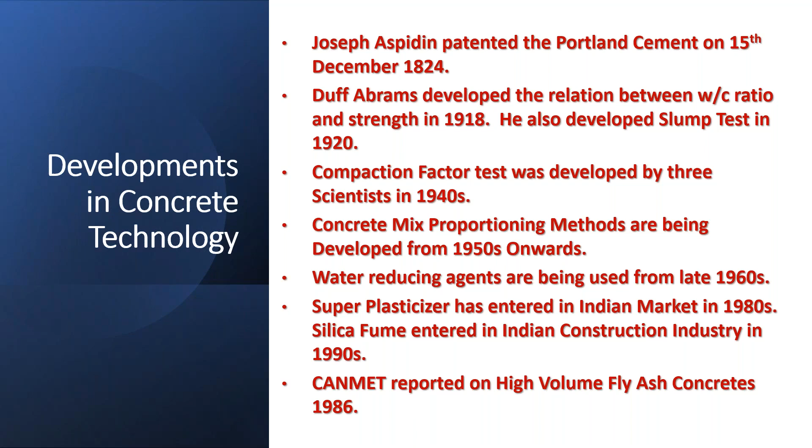Superplasticizer entered the Indian market in the 1980s. Silica fume entered Indian construction industry in the 1990s. CANMET reported high volume fly ash concretes in 1986. High strength concretes became more significant in the late 1980s and early 1990s. Works on high performance concretes have been reported from 1994 onwards.

The present scenario is that many scientists and concrete technologists are working on service life prediction of RC structures, structural health monitoring, usage of nanomaterials in concrete, enhancing the ductility of concrete, 3D printing, and also performance-based concrete mix proportioning. I want to spend this one hour on the last item, that is performance-based concrete mix proportioning. That is today's topic.

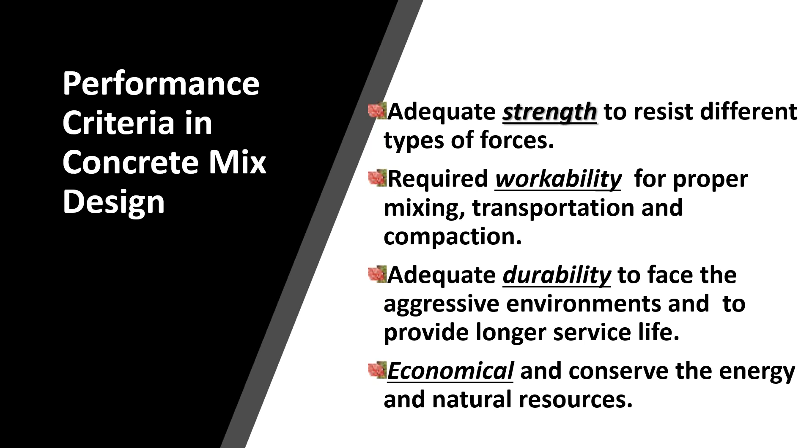What is the performance criteria? We design a concrete mix for adequate strength to resist different types of forces, and also we design for workability. Another important criteria is durability, and finally it has to be economical.

Other considerations are that the concrete mix has to be pumpable, and it has to develop early strength in the case of chimneys and cooling towers. Development of later strength is required in the case of hydraulic structures, and it has to be impervious in the case of water tanks. It should have volume stability in the case of precast concrete structures, and it should give lesser heat of hydration, especially in hydraulic structures, that is mass concrete. It should also have self-consolidation when there is congestion of reinforcement.

These are all the requirements of the concrete mix. We have to proportion the concrete mix according to our needs. There are mainly three criteria in designing a concrete mix: strength, workability, and durability. There are adequate methods to quantify strength and workability, but there is no definite method to quantify durability at the time of concrete mix proportioning.

This I want to discuss in this one hour: how to quantify durability at the time of concrete mix proportioning. I want to address this topic.

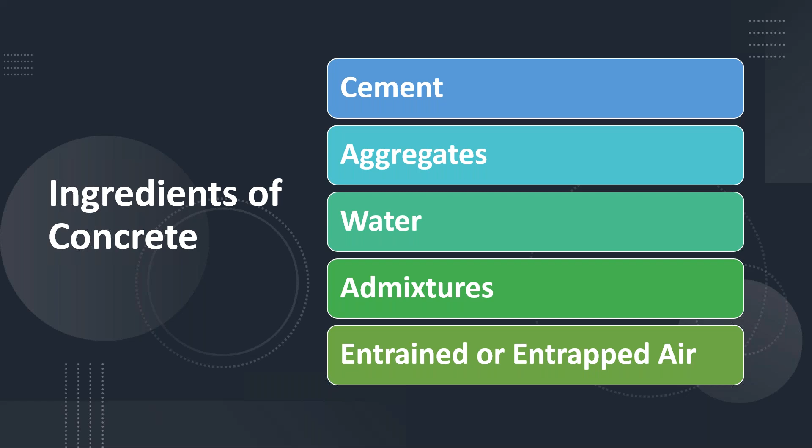The ingredients of concrete are cement, aggregates, water, admixtures, and entrapped or entrained air.

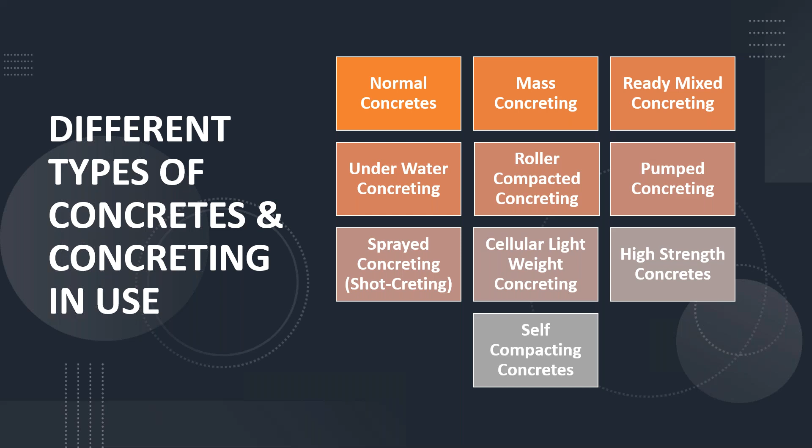We can develop different types of concretes depending on our requirement: normal concretes, mass concreting, ready-mix concreting, underwater concreting, roller compacted concreting, pumped concreting, sprayed concrete that means shotcreting, cellular lightweight concreting, high strength concretes, self-compacting concretes, and the list goes on. There are also lightweight aggregate concretes, heavyweight aggregate concretes, high volume fly ash concretes, geopolymer concretes, and pervious concretes.

Let me briefly give the developments of concrete mix proportion. Volumetric proportions were used in early 1960s because proper awareness of concrete mix proportion was not there. Proper awareness on chemical admixtures was not there up to early 1970s, and good quality fly ash was not available up to 1970s. After that, good quality cements, fly ash, and GGBS became available from 1980 onwards. The use of superplasticizers has revolutionized concrete technology from 1980 onwards.

If we look back, our limit state method was developed about 40 years back. At that time, the maximum strength was not more than M40. Now, with the use of superplasticizers and silica fume, we are getting M80, M100, and more, because these two things have revolutionized concrete technology. The use of blended cements and supplementary cementitious materials has enhanced the durability of concrete. Yes, these are all positive things.

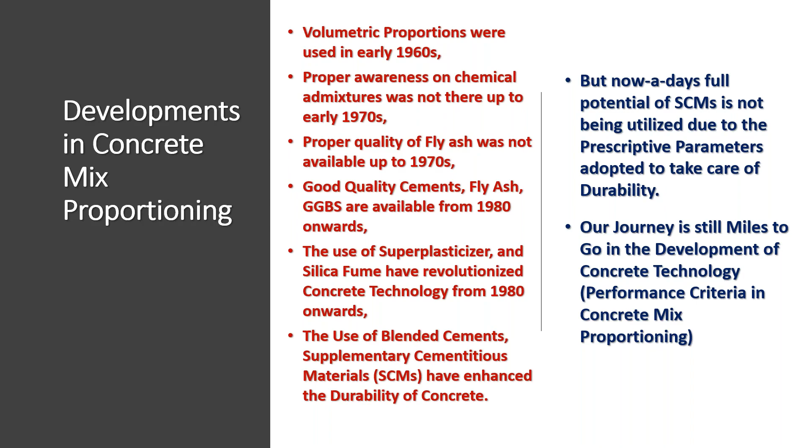But nowadays, full potential of SCMs, that is supplementary cementitious materials, is not being utilized due to the prescriptive parameters adopted to take care of durability. I will explain this in detail in the due course of my lecture. Our journey is still miles to go in the development of concrete technology. That means instead of using prescriptive parameters, we have to go for performance criteria in concrete mix proportioning. This I want to address.

Over a period of time, different people have developed different relations and expressed them in terms of graphs or tables all over the world. Different countries have gathered all these relations together, and keeping them together, they have developed different concrete mix design methodologies. Over time, more refinement has taken place, and with the improvement in the quality of materials, our mix design methodology has also changed from time to time.

The main relations in concrete mix design include water-cement ratio versus strength, workability versus total water content, maximum size of aggregate, air content, and the relations between water-cement ratio and aggregate-cement ratio, and also aggregate-cement ratio versus workability, maximum size of aggregate, shape, texture, gradation of aggregates, and recommended workability for different types of works. Okay, these are all the things.

If we see it in a nutshell, the ACI method, our own method, or the British method, more or less these are all the relations involved, just in different forms. I would like to briefly explain about the ACI method and also the IS method.

The reason is I was involved in the revision of IS 10262, the 2009 version. At that time, I was working at CBRI as a scientist, and the first discussion took place about the need for revision of this mix design code.

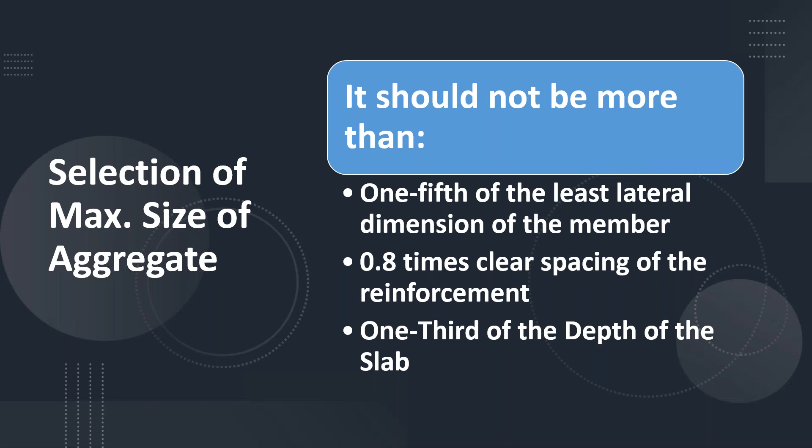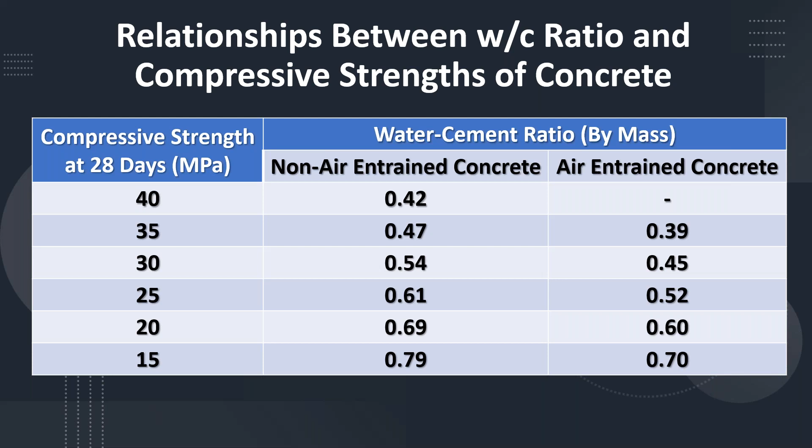So with certain modifications and approximations, we changed these values and brought them into our code. There are also certain correction factors in the ACI code, and we have adapted correction factors for different water-cement ratios, different slumps, and different shapes of aggregate, and also for what the water content should be if we use superplasticizer. We have given certain correction factors for all these things.

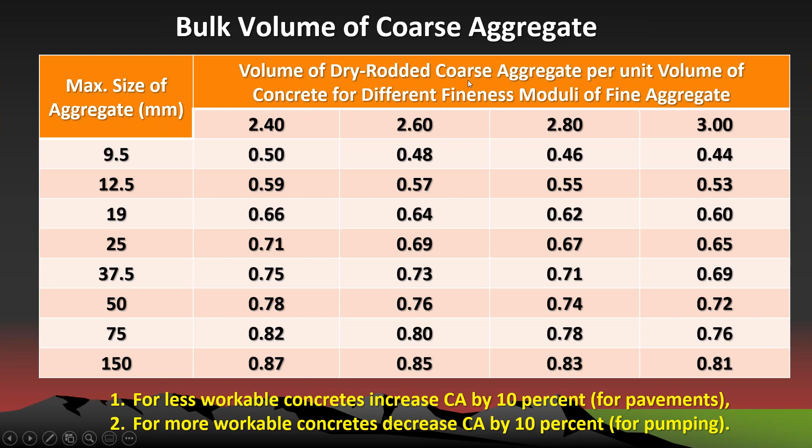Whereas in our code, we follow saturated surface dry condition. This is for unit volume of concrete, whereas that is not for unit volume of concrete - that is volume of coarse aggregate per unit volume of total aggregate, and this is the solid volume.

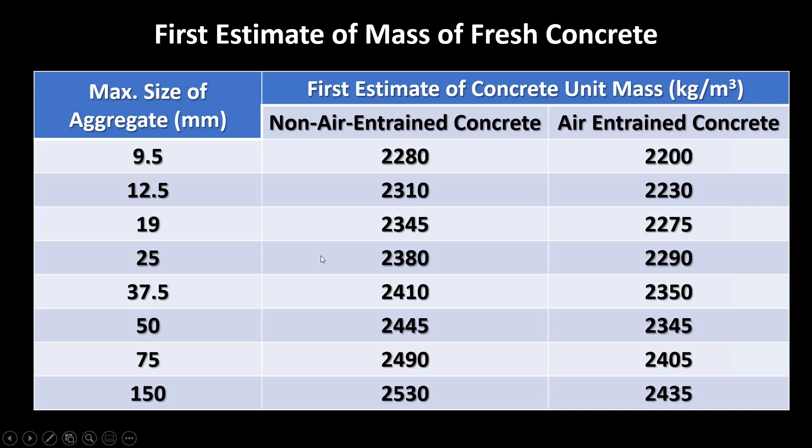So the genesis of this matter - IS 10262, 2009 version - it was first published in 1982 by NCB. I also worked in NCB, National Council for Cement and Building Materials, for 10 years.

Various requirements have been modified in line with IS 456:2000, and at that time it was discussed that it would be better to remove this water-cement ratio to strength relation. It was totally removed, and the requirement of entrapped air was also removed in that 2009 version.

And illustrative mix design examples were given in that code. The information required is grade of concrete, type of cement, maximum size or nominal size of aggregate, and all those things required for concrete mix design.

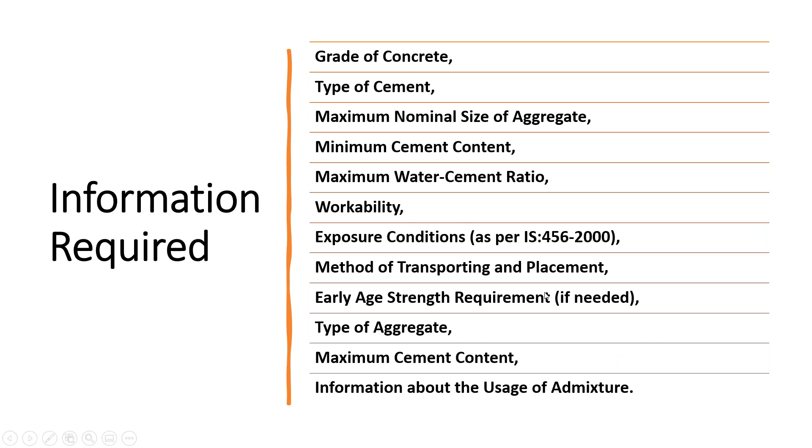Target mean strength equals 1.65 times the standard deviation plus the characteristic strength. These are all the values suggested for standard deviation.

This is the assumed standard deviation, but actually if you have a minimum of 30 values, you can calculate your own standard deviation and adopt that in your concrete mix design.

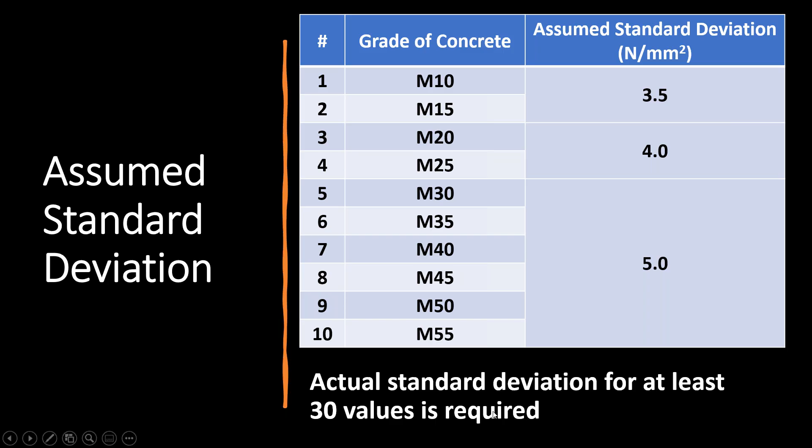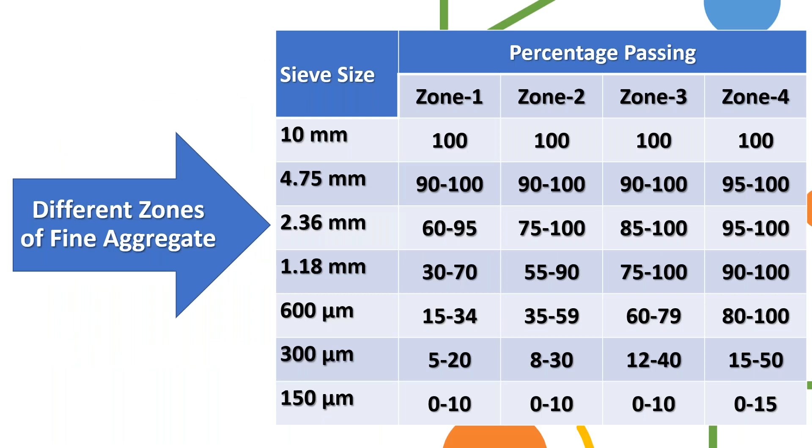The parameters employed - these are again the same table I explained earlier, and this is the sieve analysis result as per IS 383 - zone 1, zone 2, zone 3, zone 4. I need not explain about this again.

Then what are the changes in the 2019 version? Because after that, IS 10262 has been further revised in 2019. These are the changes in IS 10262:2019 version.

Separate guidelines have been provided for high strength concrete, mass concrete, and self-compacted concrete in this code. Earlier, these guidelines were not there.

And different percentages of entrapped air have been recommended for different grades. Earlier, entrapped air was removed; now it has been reintroduced.

And relations between water-cement ratio and 28-day compressive strength have been provided. Earlier it was removed, now it has been introduced.

The other changes are certain ranges of percentage of mineral admixtures like fly ash, GGBS, metakaolin, and silica fume have been specified for high strength concrete.

Three illustrative examples have been provided for design of normal concrete with PPC, fly ash, and GGBS. Separate examples have also been provided for mass concrete and high strength concrete - a total of 6 illustrative examples have been provided in the revised IS 10262.

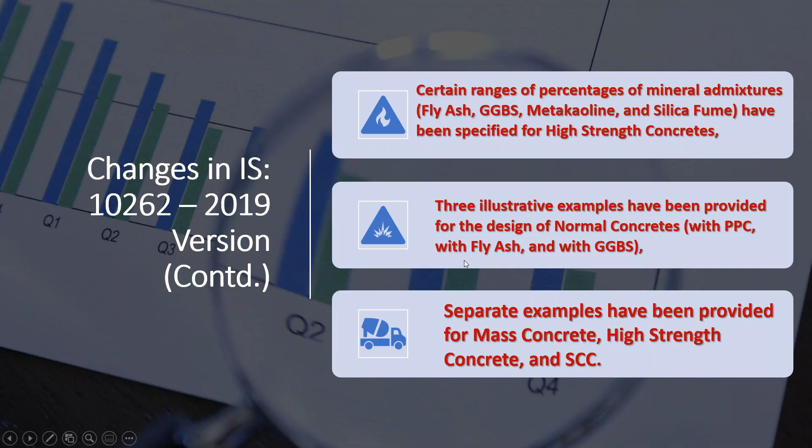This is the relation for target mean strength - two relations have been given. FCK target is equal to FCK plus 1.65 times standard deviation. Another relation is provided based on a factor related to the grade of concrete - that is F dash CK equals FCK plus X - and separate tables have been given for this.

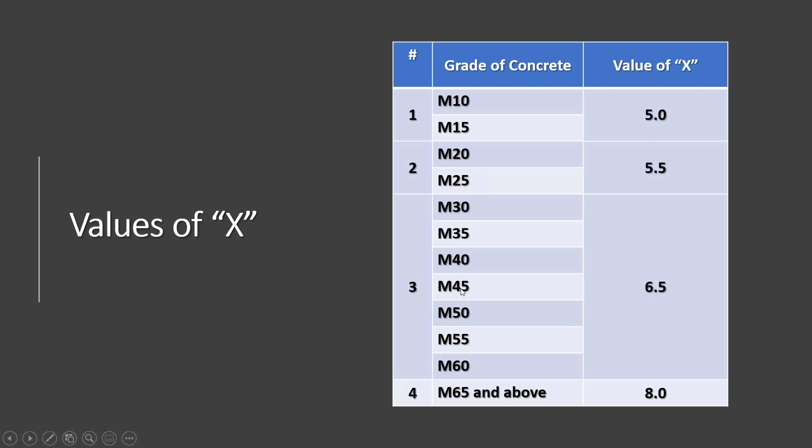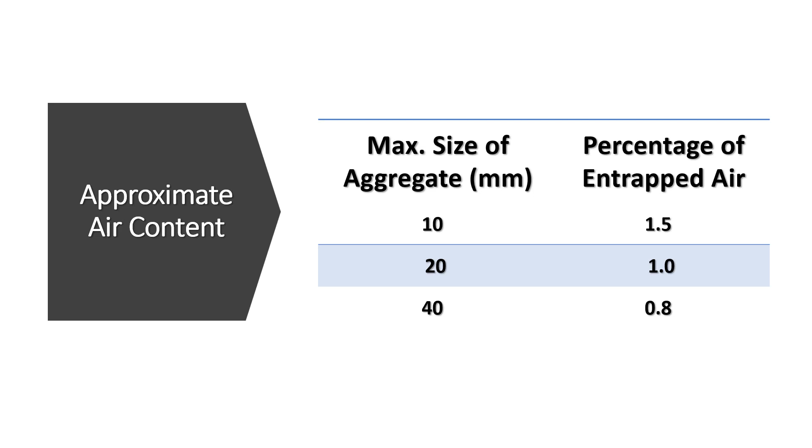So this is the table for the X value, the factor based on the grade X factor, that you can add for different grades of concrete, and this is the assumed standard deviation as per the new code. And this is the percentage of entrapped air for different sizes. For 10 mm it is 1.5% by volume, for 20 mm 1%, and for 40 mm 0.8%.

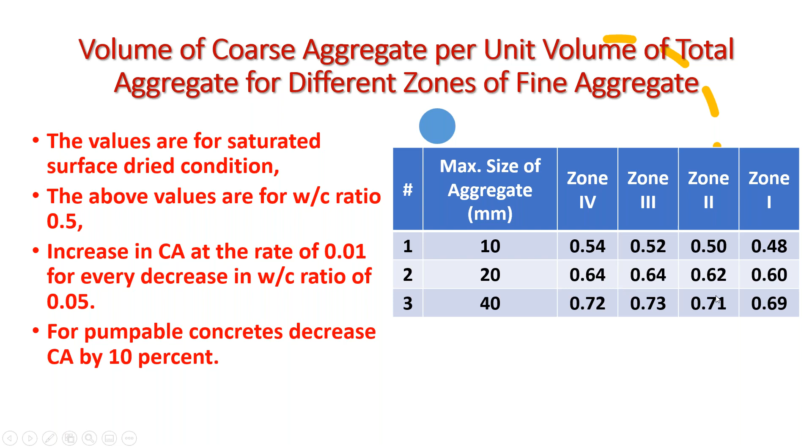There is a small change between the 2009 version and 2019 version. In some of the zones these values have been changed. The solid volume of coarse aggregate has been slightly changed in some cases. So this is the revised table.

And these are all the doses of mineral admixture for high strength concretes. If you are designing high strength concrete, then your fly ash has to be between 15 to 30% in the concrete mix, GGBS has to be between 25 and 50%, metakaolin 5 to 15%, and silica fume 5 to 10%.

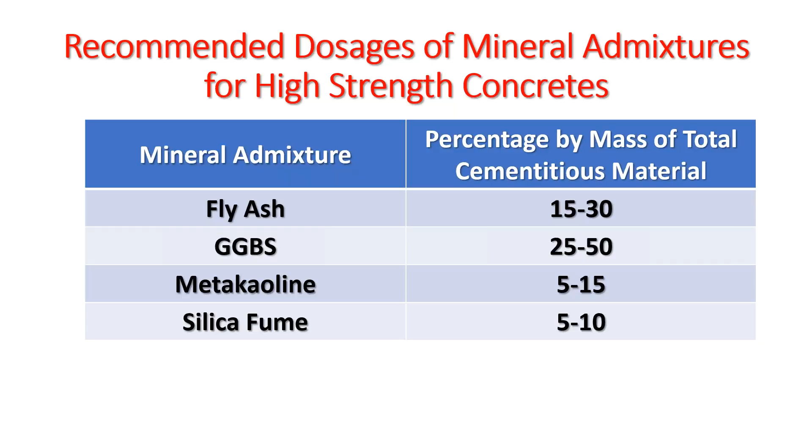Now I will come to the actual picture. I want to discuss durability, which is the main theme of this lecture. Our IS 456 divides the exposure conditions into mild, moderate, severe, very severe, and extreme.

What is mild is defined very clearly in our code, and I'm not going to read this because everybody knows about it. The moderate condition is well defined in the code, in table number 3 of IS 456. Severe has its definition, very severe is well defined, and extreme as well. This is the classification of the 5 different exposure conditions.

Now I am reproducing table number 5 of IS 456. So again the same exposures: mild, moderate, severe, very severe, and extreme. This is for plain concrete, but I'm not bothered with plain concrete — I'm more concerned about reinforced concrete. So certain prescriptive parameters have been given: minimum cement content, maximum water cement ratio, and minimum grade of concrete.

Now I want to address this in this lecture. These are called prescriptive parameters. Prescriptive means, suppose if you are designing concrete for a severe exposure condition, your minimum cement content has to be 320, your maximum water cement ratio has to be 0.45, or the minimum grade of concrete is specified. You are prescribing a concrete with these, but you are not sure whether it is going to give the required durability or not. I'll explain in detail.

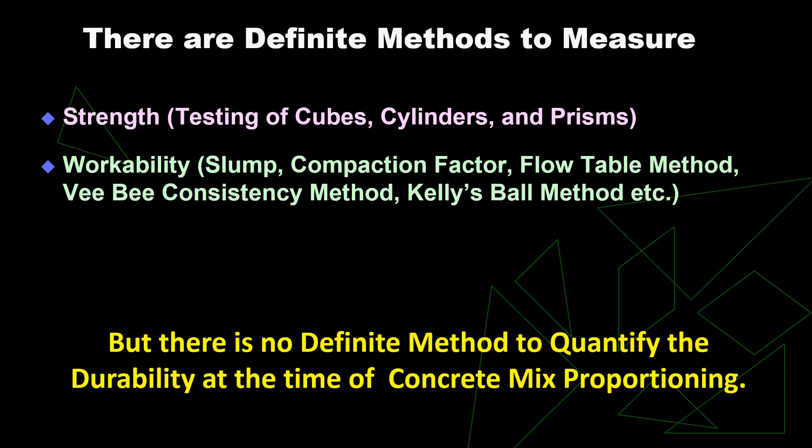As I explained earlier, there are definite methods to quantify the strength and workability, but there is no definite method to quantify the durability.

As I explained, there are two types of parameters to consider for durability. One is prescriptive in nature, as I told you — minimum cement content, maximum water cement ratio, minimum grade of concrete. Then there are performance-based parameters, which I will explain.

So these are the prescriptive based parameters: maximum water cement ratio, minimum cement content, and minimum grade of concrete. Apart from this, the type of cement — whether it has to be OPC, PPC, or PSC — and limits on the quantities of supplementary cementitious material, whether it has to be 40% fly ash or 40% GGBS, or whatever percentage of supplementary cementitious material has to be there. Also limits on the grading of aggregate and dosage of chemical admixtures — these are all prescriptive parameters.

What are the performance-based parameters? Heat of hydration — if you are designing a concrete mix for mass concrete, your heat of hydration should not exceed this much. Porosity, pore size distribution, permeability — your permeability should not exceed this much. Your RCPT, your chloride content should not exceed so much. UPV, rebound hammer, alkali-silica reaction through mortar bar expansion, and resistance to abrasion and erosion — these are all performance-based parameters. Volume stability, expansion, contraction, resistance against carbonation, and resistance against corrosion of the reinforcement — these are also performance-based parameters.

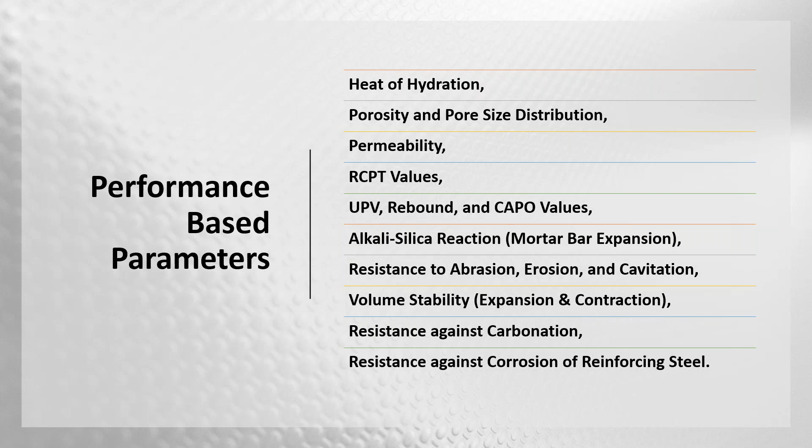Now we have to address our concrete mixes using these performance-based parameters. We have to address all of them instead of just the prescriptive parameters. So why do we get durability problems in concrete? Durability.

The main problems are corrosion of the reinforcing steel due to ingress of chloride ions, carbonation, or a combination of both. This is one reason.

Another reason is the cyclic effect of expansion and shrinkage due to alternate wetting and drying, and cyclic expansion and contraction due to changes in ambient temperature and relative humidity.

Also, decomposition of the concrete and leaching of lime due to industrial and acidic environments. These are some of the durability problems.

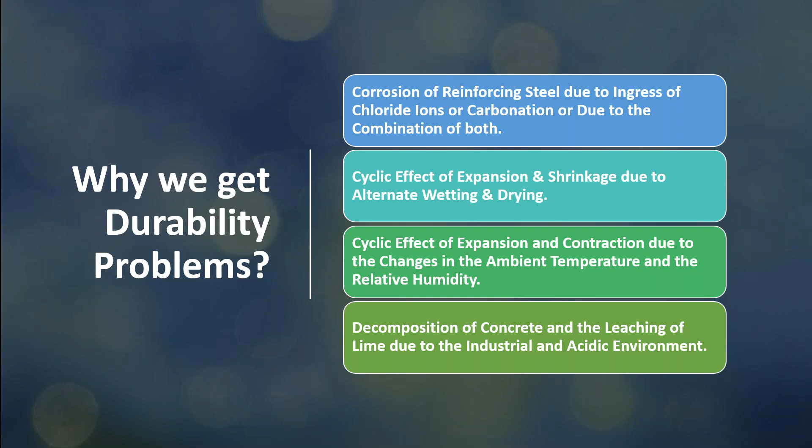That is the prescriptive parameters. According to Hillsgrove, one scientist, this approach frequently yields unsatisfactory results, and it is a common objective of concrete researchers and engineers to develop performance criteria.

Performance criteria that would allow more reliable estimates. That was a statement given by Hillsgrove, 1989.

In many codes and specifications, compressive strength of the concrete, the limit for the maximum water cement ratio, and the limit for the minimum cement content are used as criteria for ensuring durability.

So it is generally accepted that concrete's resistance to the penetration of aggressive media largely governs concrete durability. Therefore, a criterion based upon such resistance would be the most reliable approach.

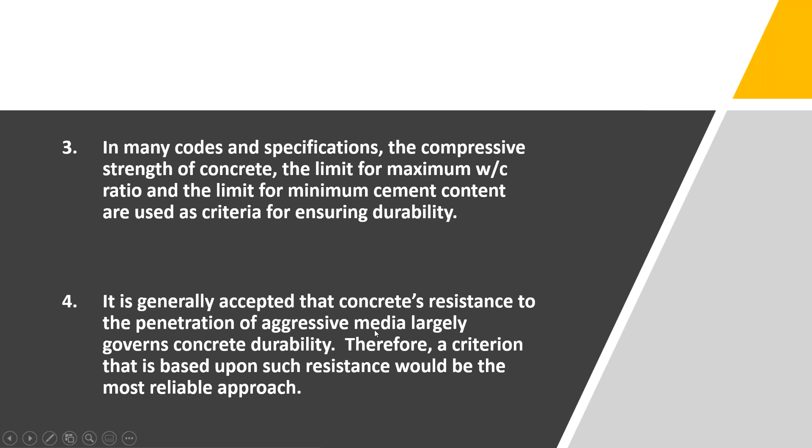That means instead of prescriptive parameters, we have to go for performance-based parameters. The advantages that are not being exploited at the time of concrete mix design.

What are the advantages? We are underestimating the pore filling effect of supplementary cementitious materials, which in turn reduce the permeability of concrete and improve the durability. We are underestimating their capability.

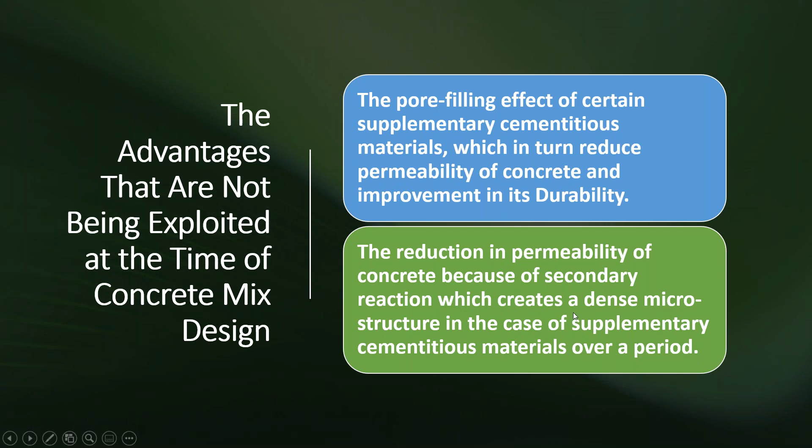The reduction in the permeability of concrete because of secondary reaction, which creates a dense microstructure in the case of supplementary cementitious materials, for a period of time.

That means they are highly durable, and we are underestimating their capability by using the prescriptive parameters.

So if we design this concrete based on the permeability criteria, we will be rationally utilizing this concrete, and we will also be saving a lot of cement.

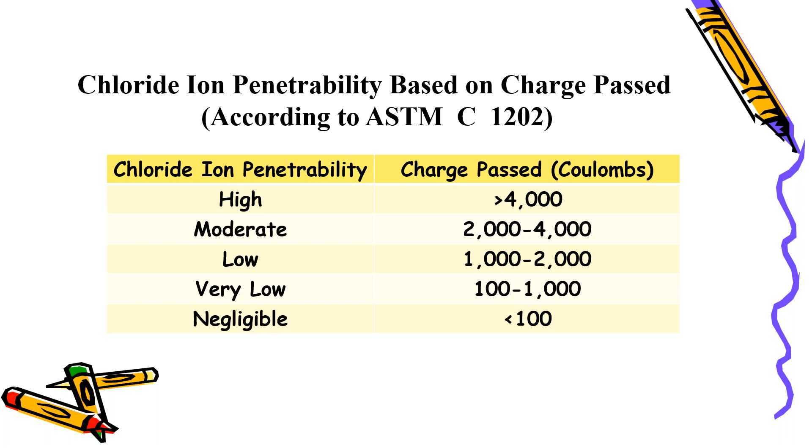We know there is a code, ASTM C1202, for the RCPT, and it has given certain values: high means more than 4,000 coulombs, moderate between 2,000 and 4,000 coulombs, low between 1,000 and 2,000, and very low a certain amount below that.

And this is our code, the requirement. If you closely observe, this table is from ASTM C1202. You see the classification: high, moderate, low, very low, negligible.

Our classification is almost the same: mild, moderate, severe, very severe, and extreme. Five classifications here and five classifications here.

High means you are allowing a high amount of chlorides, equivalent to mild. Then the same is given as moderate, and severe means low, and so on. There is a similarity between this table and this table.

So why can't we adapt this system here? Instead of these prescriptive parameters, we can adopt the performance-based parameter, meaning expressing our durability in terms of coulombs, that is, in terms of permeability.

I did some work in this area during my tenure in CBRI.

So you see these are the values given by code 1202, whereas based on my estimates, I got this range: mild, moderate, severe, very severe, and extreme. So these are the coulombs.

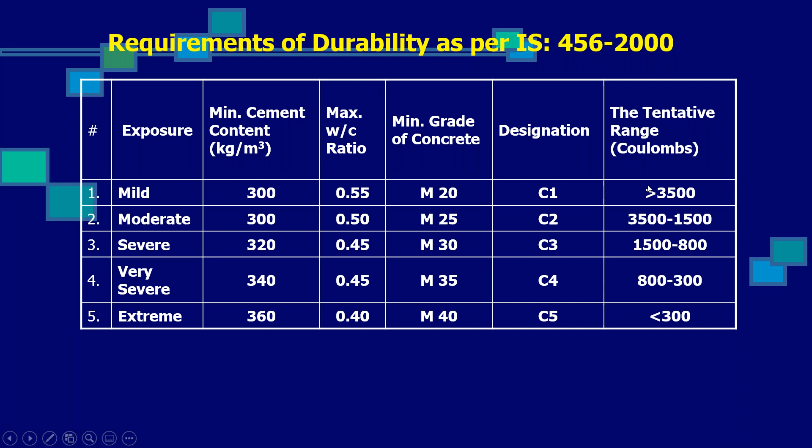So why is permeability the most important factor? Why do I want to address durability in terms of permeability? Because permeability involves the ingress of the aggressive solution and also removal of the dissolved reaction products from out of the concrete.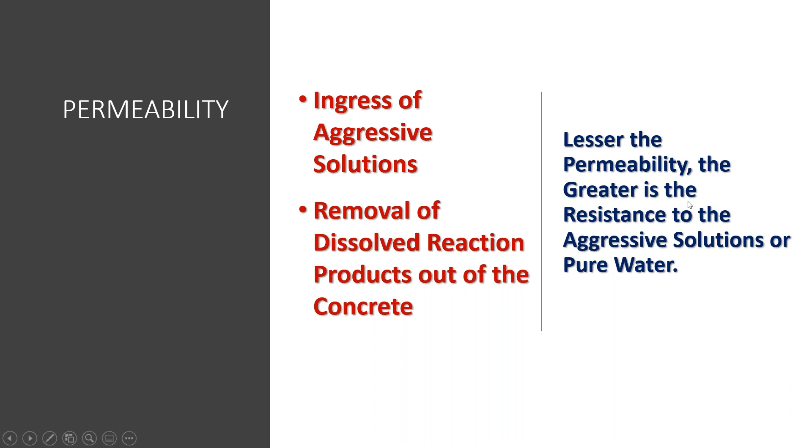Lesser the permeability, the greater is the resistance to aggressive solution. So here I want to address one thing. Pure water is a friendly material to the concrete during its mixing and curing. After that, it is not a friendly material. It will be an enemy.

The reason is, you see the molecular structure of water, H2O. Two hydrogen ions are connected at one end. Because of this, there is a residual positive charge and also a residual negative charge. That's why this water molecule is called dipole, dipole in nature.

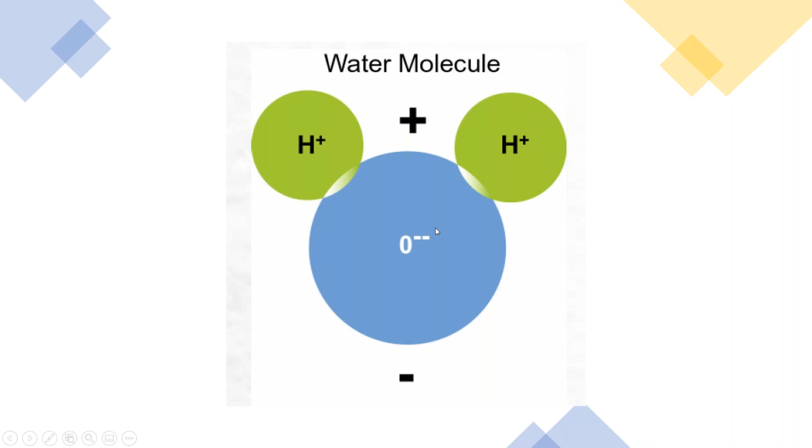Because it is dipole in nature, what will happen? When this water enters into the capillary pore in the concrete, because of its dipole nature, it will try to attract more and more water molecules into the capillary pore and it will exert pressure on the pore walls of the concrete.

That's why when our slab is leaking in one monsoon season, we get sleepless nights. Suppose if you neglect that leakage in one monsoon, in the next monsoon your leakage will be more severe. That is due to the dipole nature of the water.

I'll give one example. Suppose if you soak the chole or chana in water, what will happen after 4 or 5 hours? The chole or chana gets swollen because the water will enter into the grain, then it will soften the grain.

Earlier, if you want to press it between two fingers, you will not be able to. After 4 or 5 hours, it will become softened, because more and more water will enter into that grain. That is one example.

Because of its dipole nature, pure water itself is very dangerous for the concrete. It exerts pressure on the pore walls, and then it gives rupture to the concrete.

Then why do I want to express durability in terms of permeability? I will explain it one by one. If you consider the sulfate attack, movement of the sulfate ions takes place through the transport of fluids. That means sulfate attack depends upon the permeability.

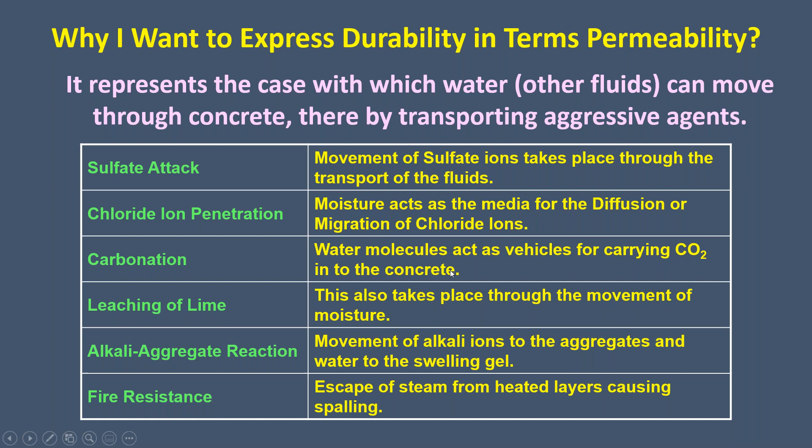If you consider fire resistance, escape of steam from the heated layers causes spalling. That means permeability is the root cause of all the durability problems. So we have to express our durability in terms of permeability.

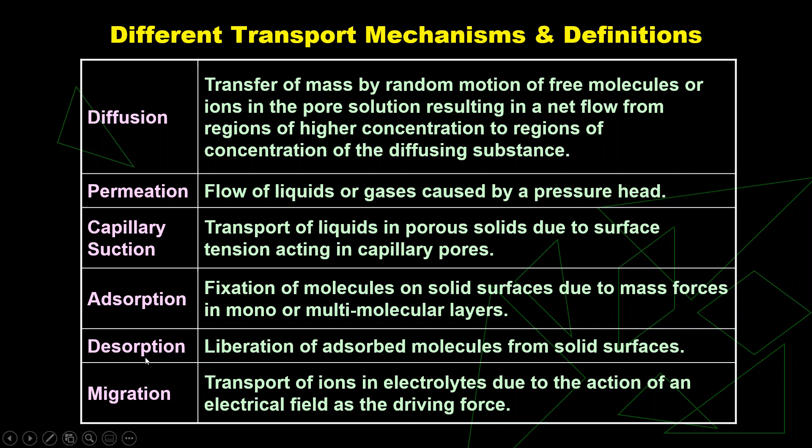The other names, other facets or mechanisms or definitions, are diffusion, permeation, capillary suction, adsorption, desorption, migration - all those things. I'm not going into the definition of these terms.

When we say the permeability of the concrete, with respect to what? Permeability of concrete with respect to water, or permeability of concrete with respect to air, or permeability with chloride.

Nowadays we are developing M80 or M100 concretes. Then measuring the permeability of the concrete with respect to water is impossible, because this relation is not clear. Although, the easiest way is to measure the permeability of the concrete in terms of chloride ion penetration.

That is RCPT. We did some work in this area. This is the permeability of concrete with respect to water, but the permeability of the concrete with respect to air - this is the diffusion.

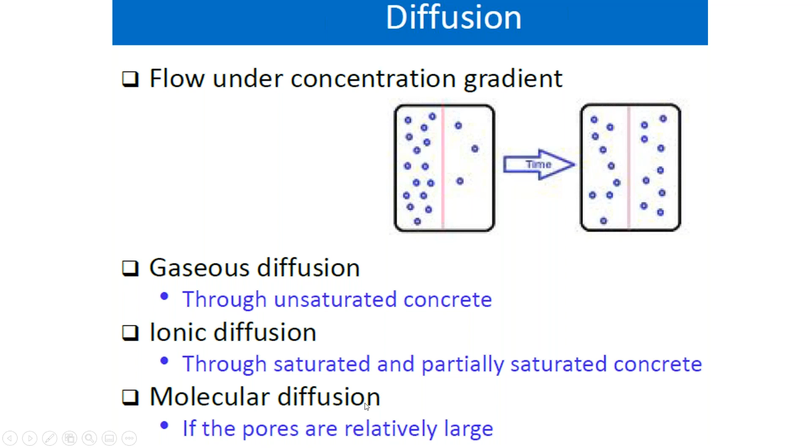When we talk about diffusion, there are three types: gaseous diffusion, ionic diffusion, and molecular diffusion. This is about RCPT.

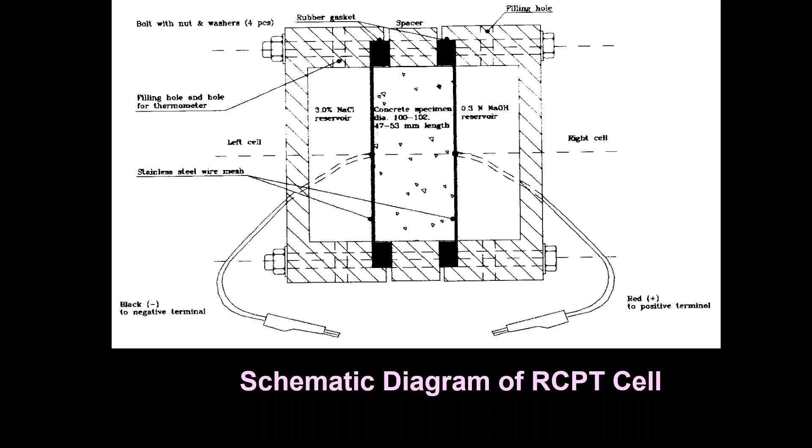Many people know what RCPT is, and also this cell - I need to elaborate this thing.

RCPT takes care of diffusion, migration, capillary suction, adsorption, and desorption. This method was developed between 1981 and 1988 by D. Whiting from the Federal Highway Administration.

This was adopted by the American Association of State Highway and Transportation Officials, AASHTO, in the 1990s, and by ASTM in the late 90s.

It is easier and faster to conduct this test. It is a well accepted test all over the world, but there is some criticism about it.

What is the criticism? The specimen gets heated up due to high voltage. Other negatively charged ions may also get transported, and this may not be suitable for concrete with larger size aggregates. Chloride ions may get transported through the weak interfaces, but even then, it is a well accepted method all over the world.

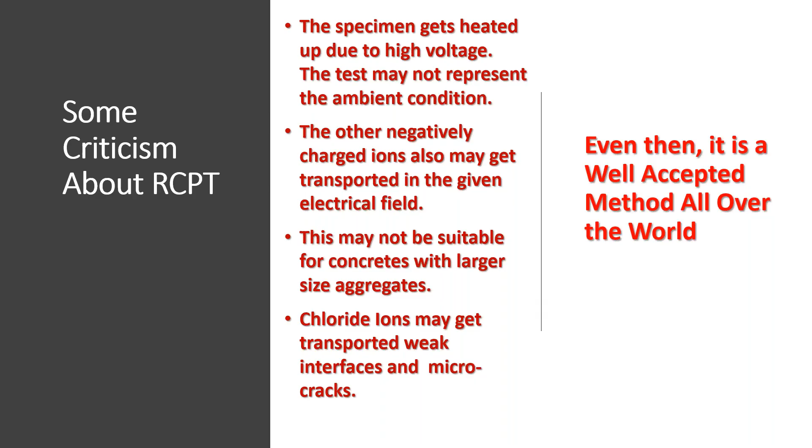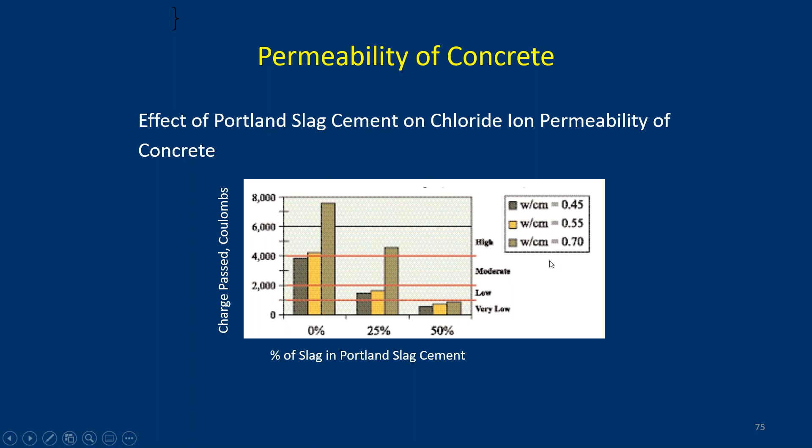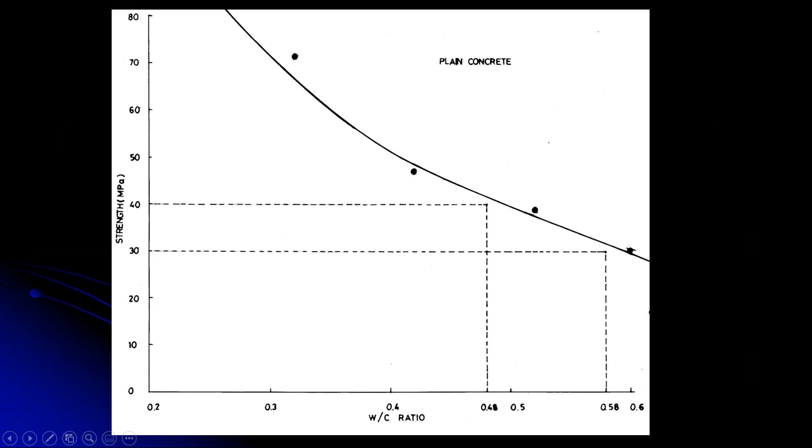We did some work in CBRI. The high volume fly ash was of course 50, 60, 70%. I am not going to explain all those things. Only thing is I want to show the coulombs values.

Everybody knows about it, but the only thing is we are not properly utilizing these materials, and that is because we are adopting prescriptive parameters, not performance parameters. So we have to rationalize our concrete mix proportion.

These are all the relations that we got for M30 grade concrete. This is percentage with respect to percentage of fly ash, and on the y-axis is plain concrete, and you can see the 50. As the percentage increases, your number of coulombs...

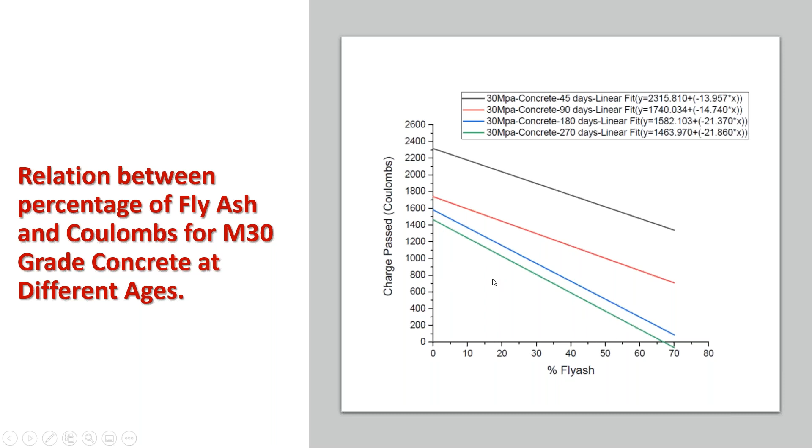On the y-axis, the number of coulombs gets reduced. That means the number of coulombs gets reduced with the increase in the percentage of fly ash. So this is the case of that grade concrete. You can see that.

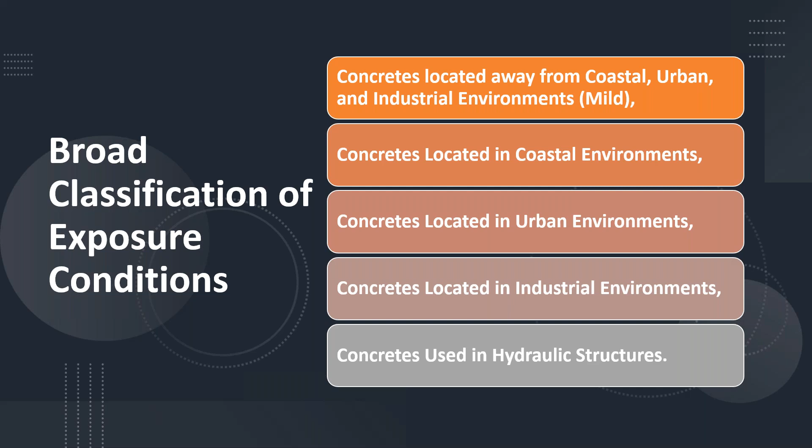With this, I want to redefine the exposure conditions. How? The concretes located away from coastal, urban, industrial environment that we can consider as mild. Concrete located in coastal environment, and concretes located in urban environment. Concretes located in industrial environment and concretes used in hydraulic structures. This is the broad based exposure condition.

Then another classification is interior concretes and exterior concretes. So your exterior concrete will have certain exposure different than the interior concrete. We have to distinguish between these two types of concretes.

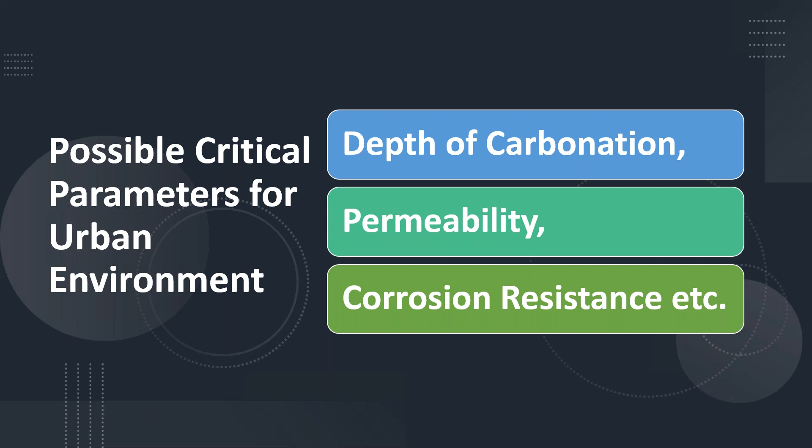Possible critical parameters for urban environment: if you are designing it, and if you want to use the performance criteria for design of concrete mixes, what are the factors we should consider? Depth of carbonation, permeability, corrosion resistance.

Possible critical parameters for coastal environment: diffusion of chloride ions, permeability, again corrosion resistance. And possible critical parameters for industrial environment: again diffusion of chloride ions, sulfate resistance, permeability, corrosion resistance, and all this.

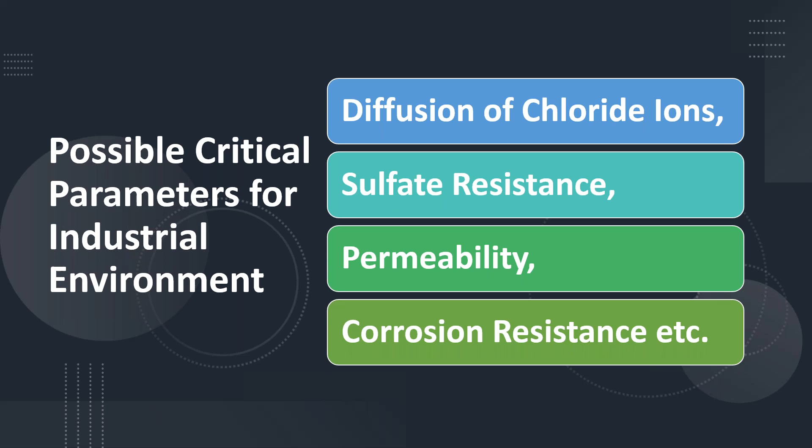The possible critical parameters for hydraulic structures. So what should be the parameters for hydraulic structure? Heat of hydration, alkali silica reaction, permeability, acid attack. Here acid attack means the reaction of soft water with concrete.

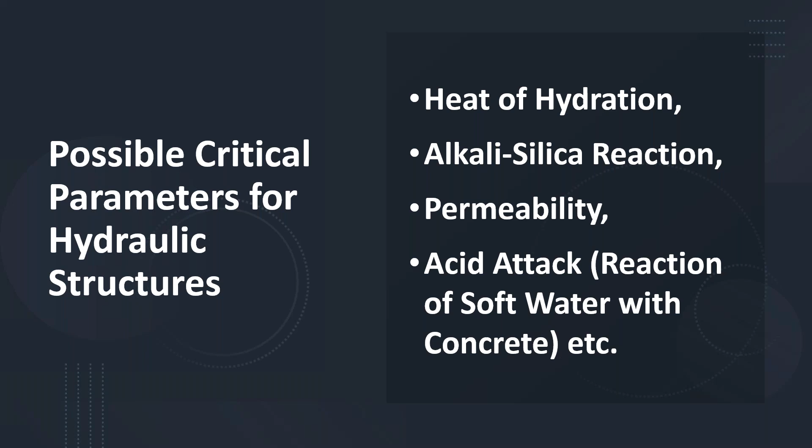Various critical parameters for pavements: if you are designing concrete for pavements, abrasion, freeze-thaw, hydraulic structure, heat of hydration, abrasion, erosion, cavitation, ASR. Onshore structures: chloride penetration. Offshore structures: sulfate attack, chloride penetration. Mass concrete: heat of hydration. Bridge types: abrasion, freeze-thaw, foundation: sulfate attack, acid attack. Metropolitan cities: carbonation. Industrial environment: acid attack, sulfate attack, chloride penetration, carbonation.

The relations need to be developed because if we have to use performance-based parameters, we have to develop certain relations. Without that we cannot, because different people have developed different relations. We are using all those relations, and we have developed our own mix design methodology. A mile to go now, because still a lot of work has to be done in this area.

Okay, what are the relations to be developed? Compressive strength and the age at different ages. We have to find out the relation between compressive strength and coulombs, water binder ratio versus coulombs, and the percentage of each supplementary cementitious material and the coulombs at different ages, and also different cement content and the coulombs at different ages. These are all the relations to be developed.

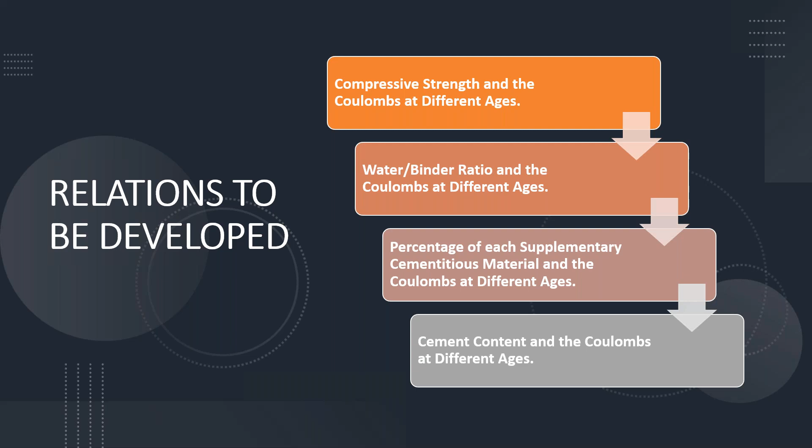These are the gray areas or research gaps. Yeah, we are doing some work here now.

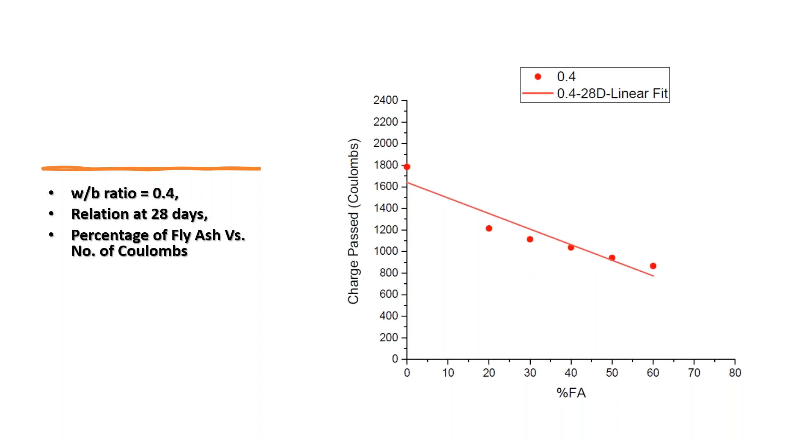At 28 days. So this is the relation for water binder ratio 0.4 at 28 days, for the different percentage of fly ash. And this is for water binder ratio 0.5 at 28 days and for different percentage of fly ash. And we're trying to give certain equations for them.

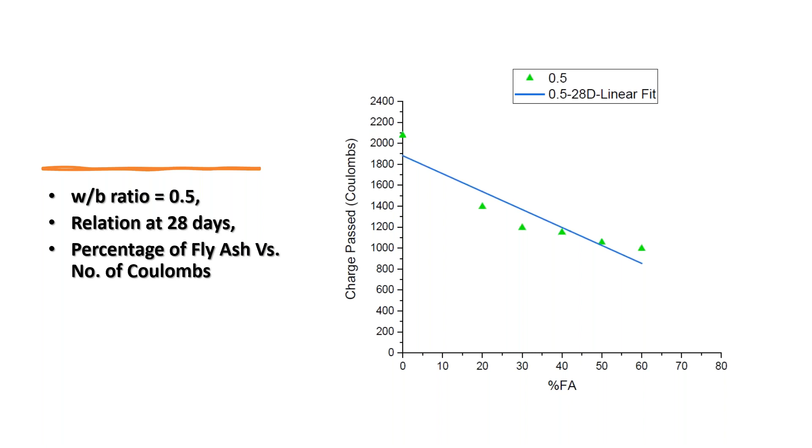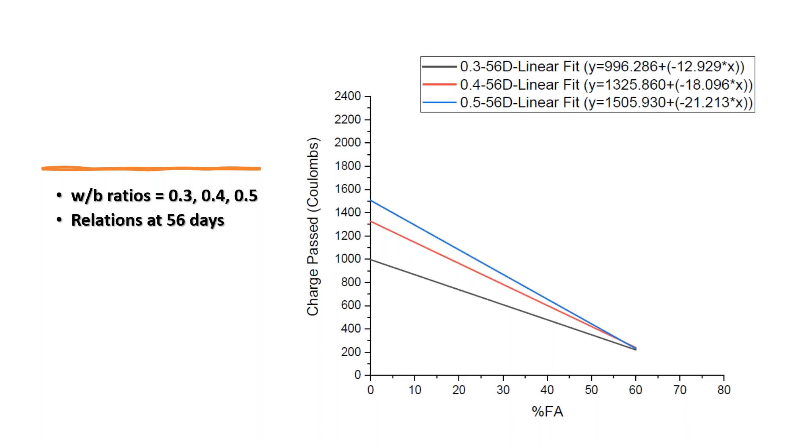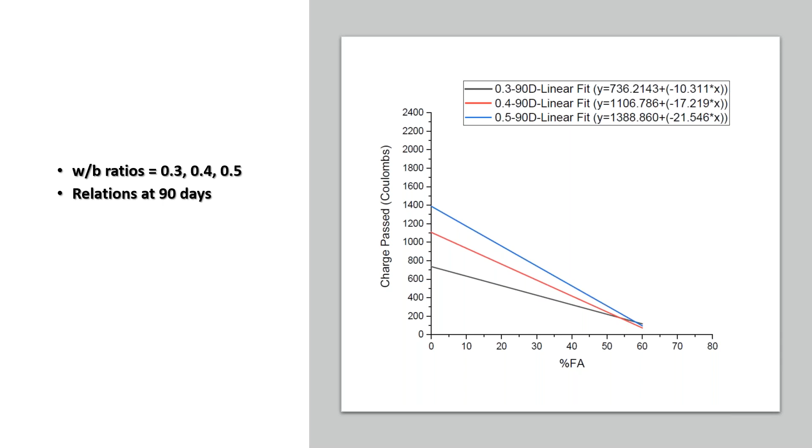So far I tried to give the relations with respect to different water binder ratios and with respect to different percentages of fly ash, with respect to different percentages of GGBS, for different number of days.

Now, what are the other performance parameters? Because RCPT is not the only thing, coulombs is not the only thing. There are other performance parameters, such as accelerated rate of corrosion of embedded reinforcement.

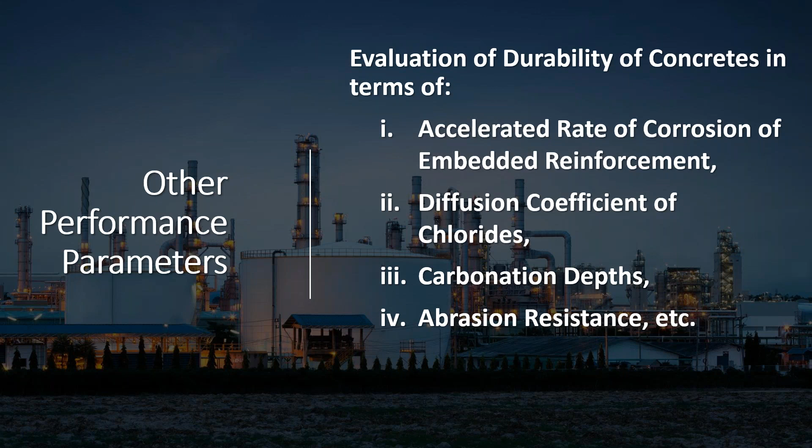That means you can measure the rate of corrosion for different concretes under accelerated conditions and express that rate of corrosion as the performance of that concrete, and also classify the performance in terms of the percentage of corrosion rate. Also, one more relation could be the diffusion coefficient of chlorides. You can measure the diffusion coefficient for different concretes and express it as a performance parameter, along with carbonation depths and abrasion resistance. So I have done some work in this area.

You can see at 180 days that this rate of corrosion is very low compared to the plain concrete, 100 times less, that means.

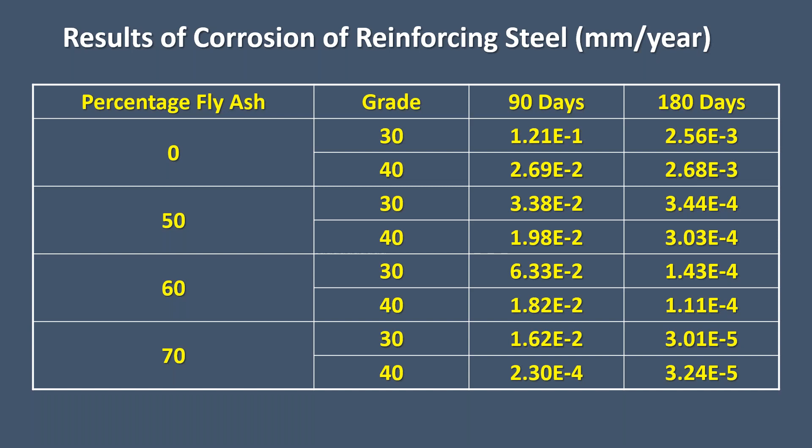So we have to properly consider these performance parameters in the design of concrete mixes so that we can rationalize our concrete mixes. Yeah, and I would like to explain about diffusion coefficients.

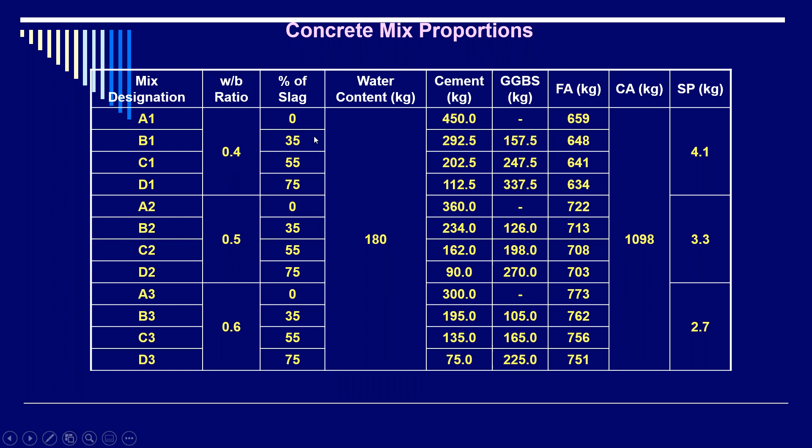So I did some work during my tenure at CBRI. These are all the different water binder ratios, 0.4, 0.5, 0.6, and different percentages of slag, and these are the mix proportions.

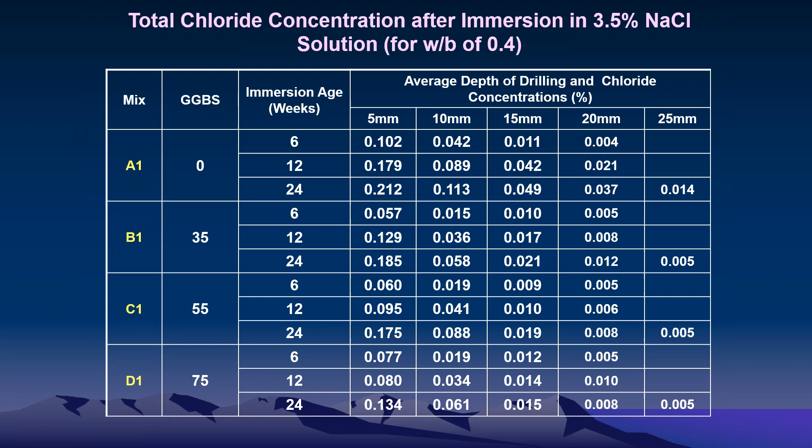At a certain number of days, we have drilled and taken out the powder from the concrete specimen. We have analyzed it at different depths, 0 to 5 mm, 5 to 10 mm, and 10 to 15 mm, and analyzed that powder to find the chloride content, and we have calculated the diffusion coefficient.

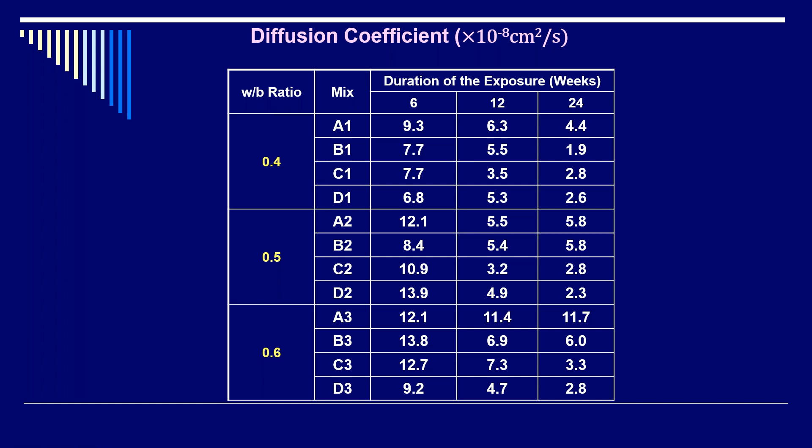We found the diffusion coefficient with a higher percentage of slag is very, very less. So here also we can express the performance in terms of the diffusion coefficient, or in terms of the rate of corrosion, or in terms of the coulombs. So we have to properly address this performance.

Yeah, I also did some work on carbonation. Just briefly, I'll go through my slides. I think I'm not exceeding my time. It is 6:30.

Before talking about the carbonation, I would like to explain the ill effects of why we should worry about carbonation. It increases the permeability and increases shrinkage, and it will also affect the corrosion.

What are the favorable conditions for carbonation to take place? Availability of CO2, and relative humidity has to be between 50 and 75%, and also average pore size has to be more than 1000 angstrom units.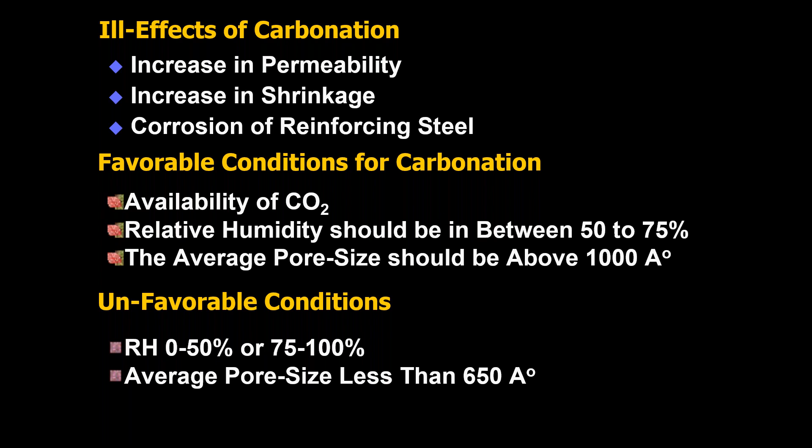What are the unfavorable conditions for carbonation? When the relative humidity is between 0 and 50, it will not take place. Also, when the relative humidity is between 75 and 100, because pores get saturated, carbon dioxide cannot enter. And when the pore size is less than 650 angstrom units, carbonation will also not take place.

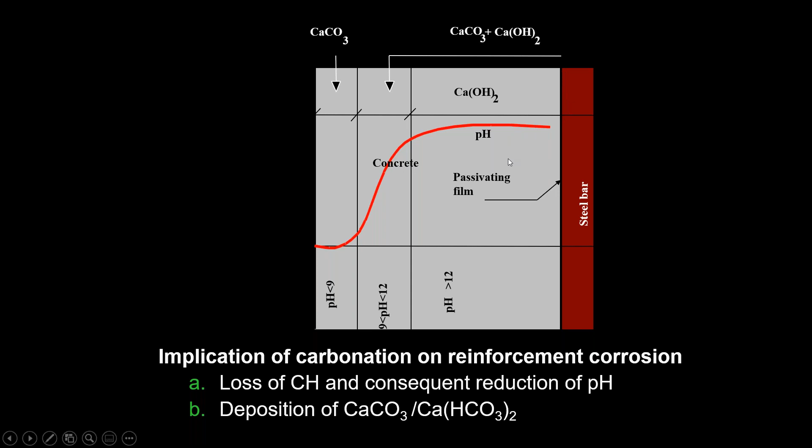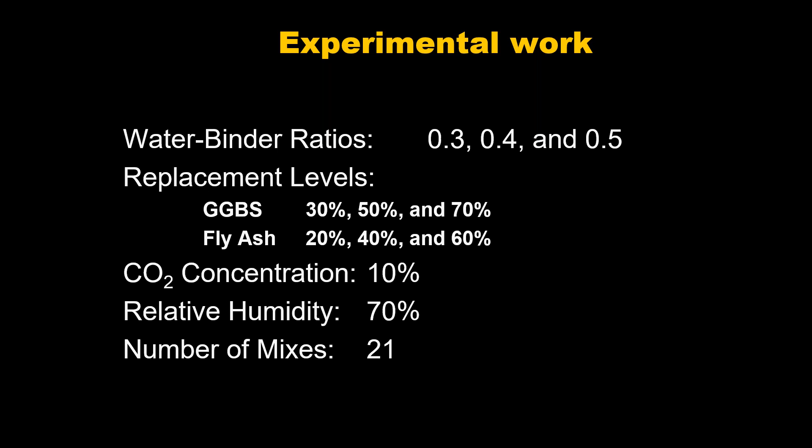So what we did - we took 3 different water-binder ratios: 0.3, 0.4, 0.5, and for each water cement ratio we took 3 different percentages of GGBS and fly ash, and it was an accelerated test. We used a chamber in which we maintained 10% carbon dioxide and 70% relative humidity. These are the mix proportions we have used.

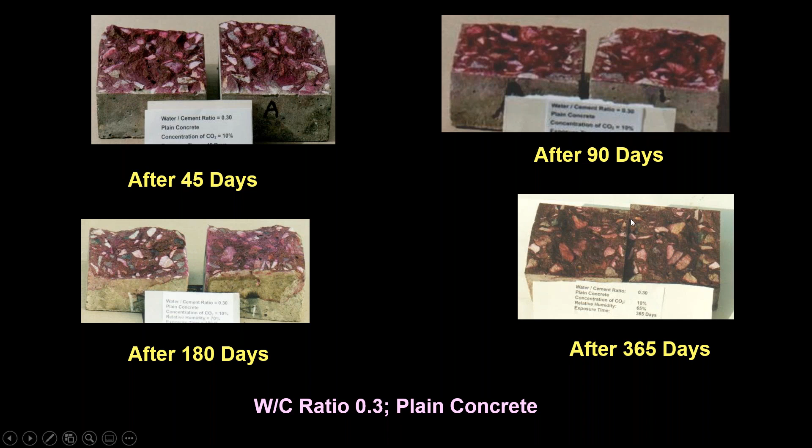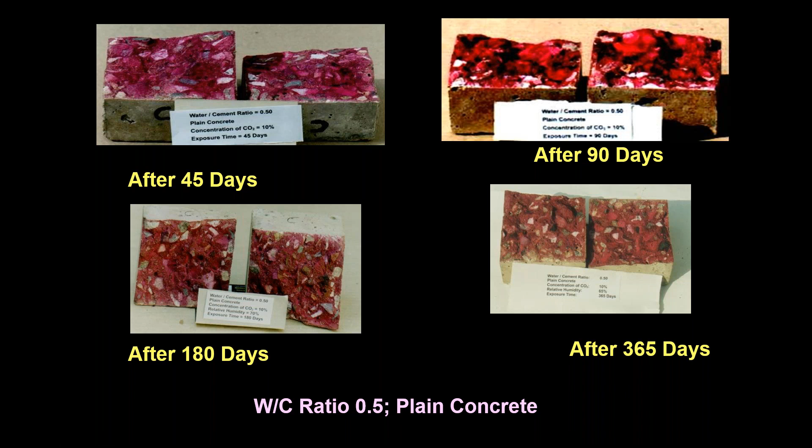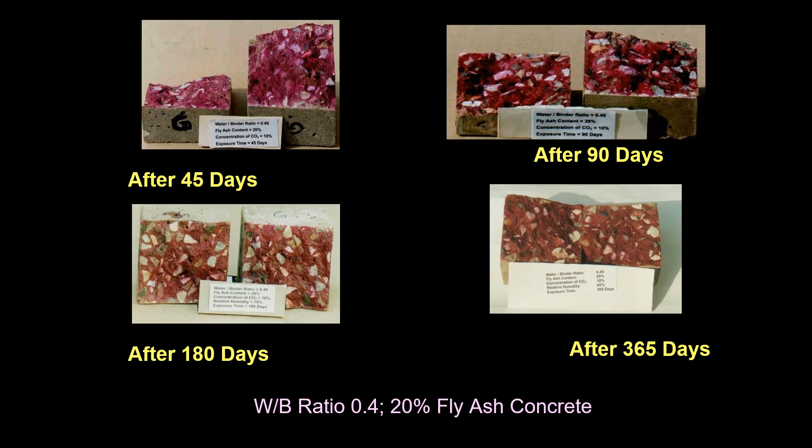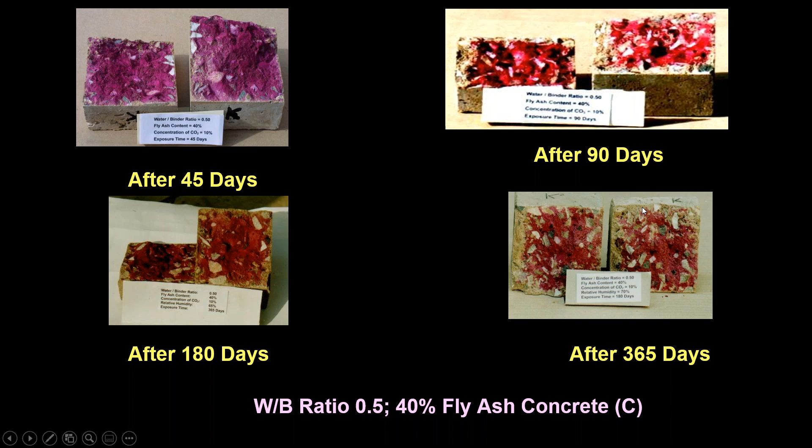Now you can see 0.5 water-binder ratio with 40% fly ash. You can see that on the edges there is carbonation. I'll quickly show this one.

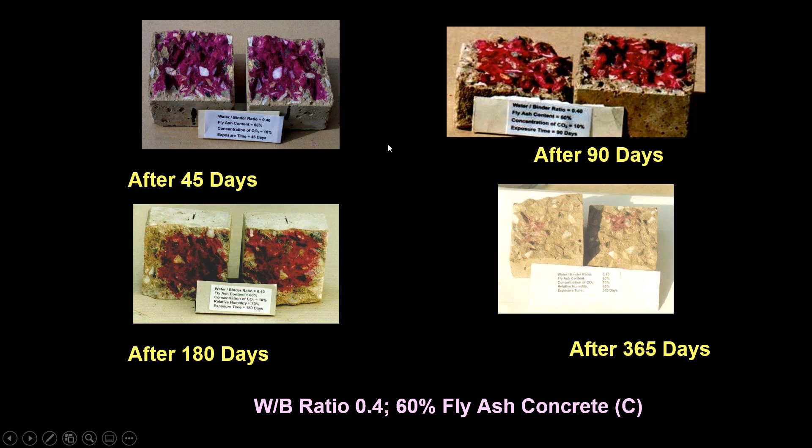Now it's quite an interesting case - water-binder ratio 0.4, 60% fly ash. You can see the carbonation started at 45 days itself. At 1 year, totally carbonated.

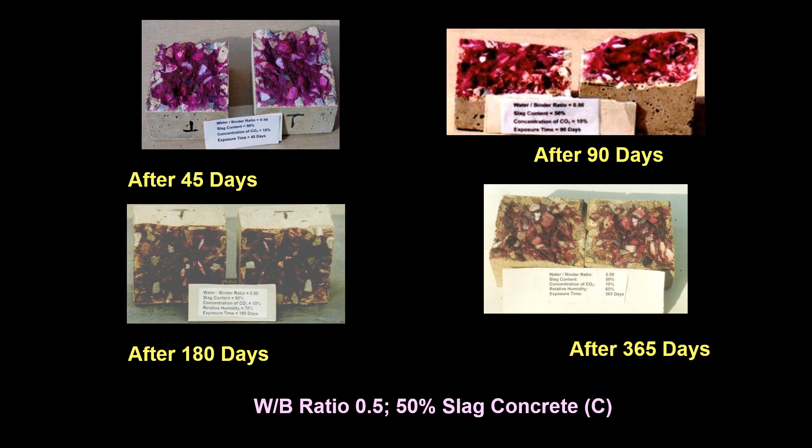Total, and this is the case of slag. I'll expand the cases where you can see. Water binder ratio 0.5, 50% slag. Yes, there is carbonation on the edges. You can see at 1 year.

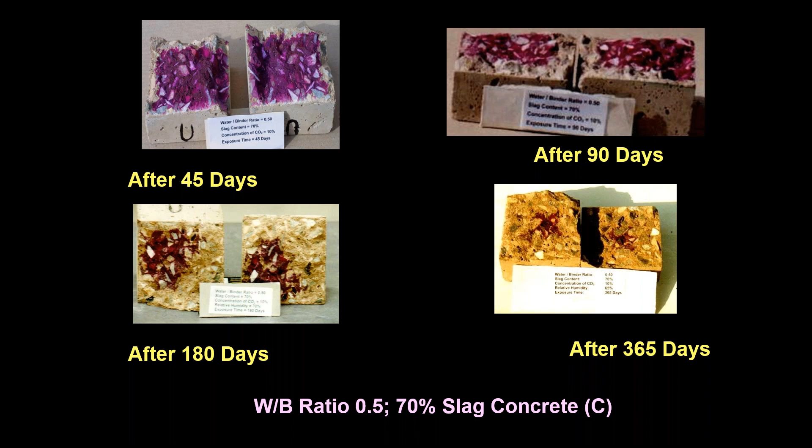These are all the carbonation depths. What are the findings? The findings are like this from this investigation. Carbonation did not affect concretes with higher quantities of supplementary cementitious materials with lower water binder ratios. Higher carbonation depths were observed with higher quantities of SCMs with higher water binder ratios.

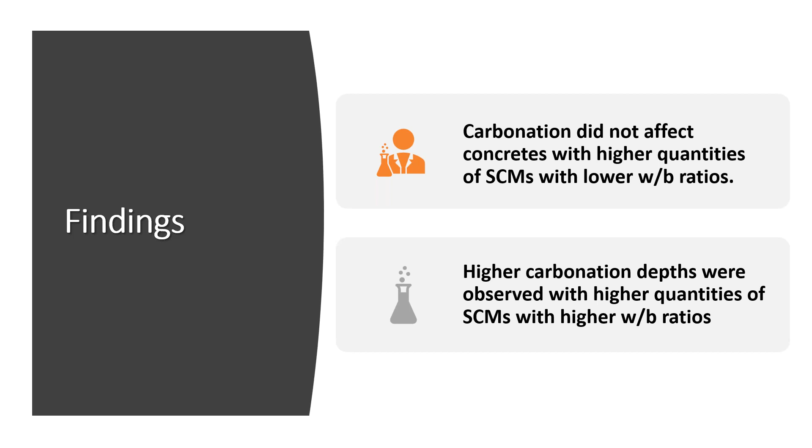It's a long journey to travel for the concrete. What is that journey? Standardization of test methods for rate of corrosion versus type of cementitious material and its water binder ratio, and specifying different rates of corrosion for different exposure conditions. Still we have to develop these relations, and also diffusion coefficients for cementitious materials with different water binder ratios, specifying different diffusion coefficients for different exposure conditions.

So apart from finding these relations, there is another thing. We must validate the results, these parameters, from time to time with the actual performance in the field. This is the most important.

What are the recommendations for future research? Still miles to go. Development of easy and accelerated methods and equipment to determine the rate of corrosion and diffusion coefficients.

Right now, easy methods are not available, nor are accelerated methods. This rate of corrosion can only be measured in a sophisticated laboratory, and it's very difficult for an ordinary laboratory to measure. We also have to develop easy methods to calculate the diffusion coefficient.